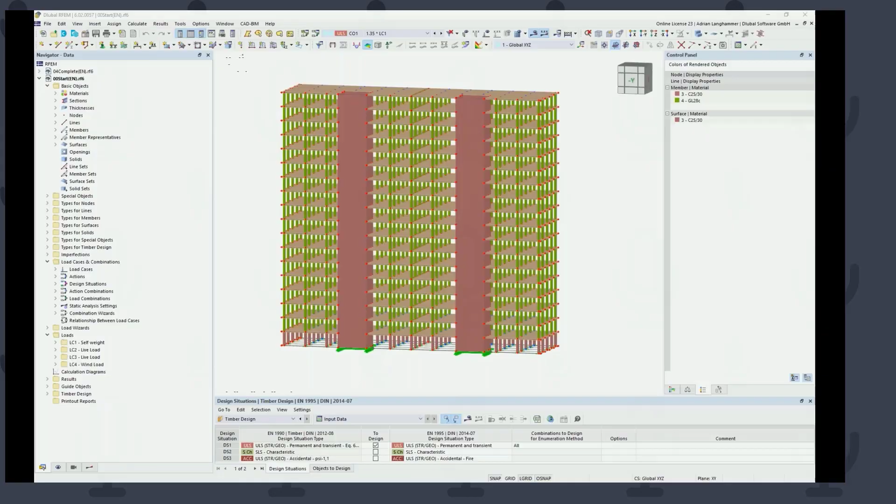Okay, that's all from my side. I hand over the screen to Adrian. So you should see now my screen. Yes. And our example, yeah. Okay, then I will start.

Yeah, today is our third webinar regarding the construction stages. Today, I would like to show the construction stages analysis based on an example which I got from my colleagues from the Timber team. They use it in their Eurocode 5 training. This example is based on a customer example from our customer Fast + Epp. You could also find it on our website. Partially, it was designed in RFEM 5.

It is an 18-story mass timber hybrid building, which was built in Vancouver. The first story of the structure is made of concrete. Also, the core is made of reinforced concrete. The columns are made of timber. They have a square cross section with 35 centimeters a side. The slabs here are made of 5-ply cross-laminated timber floor panels, CLT panels, which have a depth of 24 centimeters.

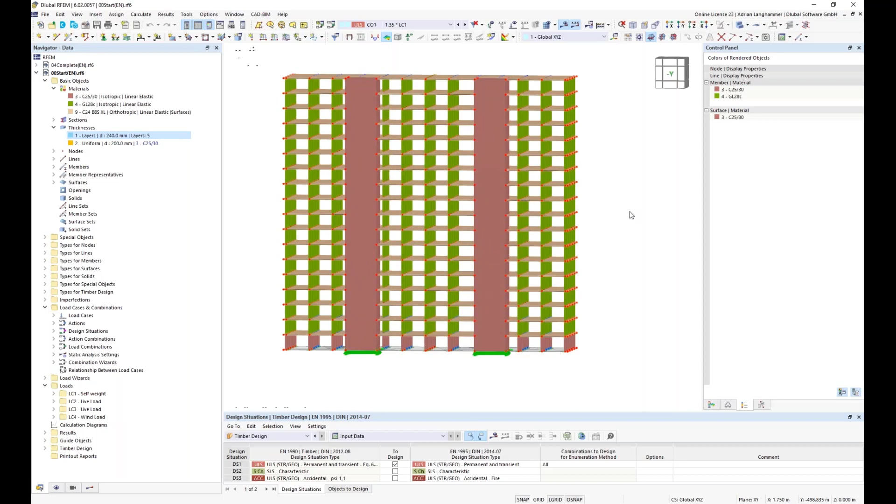But the focus today is not the timber design. It is rather the determination of the internal forces for the design and the consideration of the construction stages. In the beginning, I have the whole structure, which was calculated without considering the construction stages. And first I will have a look at the results without consideration of construction stages. So to do this, I switch over to the wireframe model.

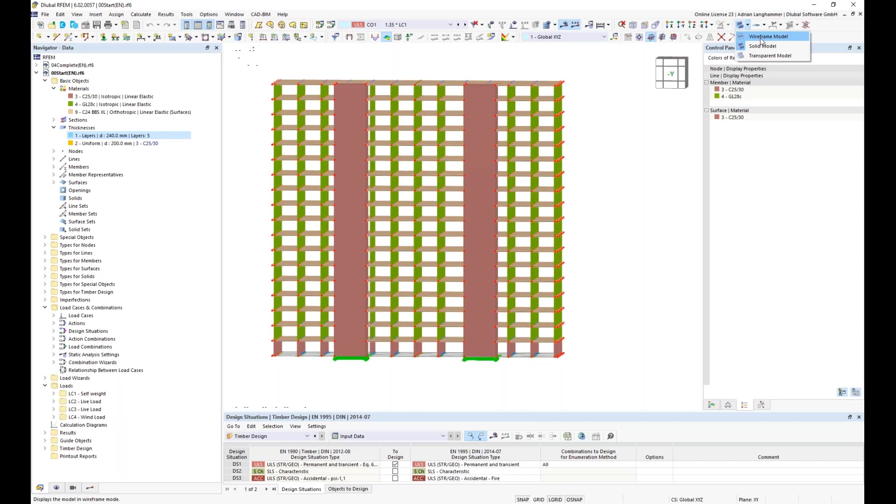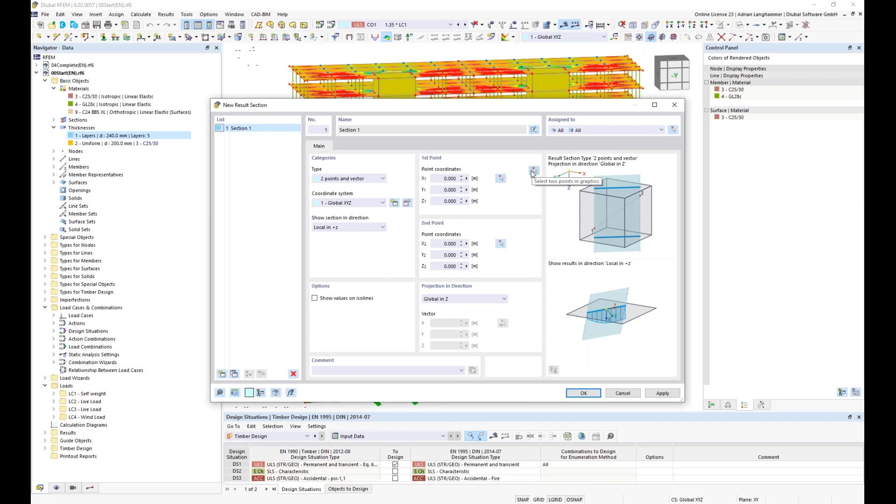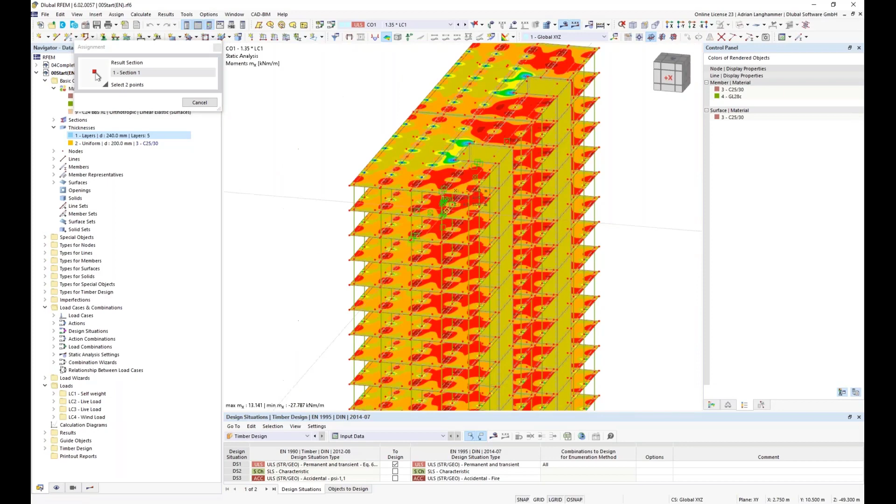We have here the internal forces in the slabs, but to have a better overview, I will create a result section through the building. You can find it here. I will do it graphically with 2 points. I could choose different planes, but I choose a plane which crosses the building core. So, for example, from this upper edge to this lower edge, the second plane here of the columns, and I say OK.

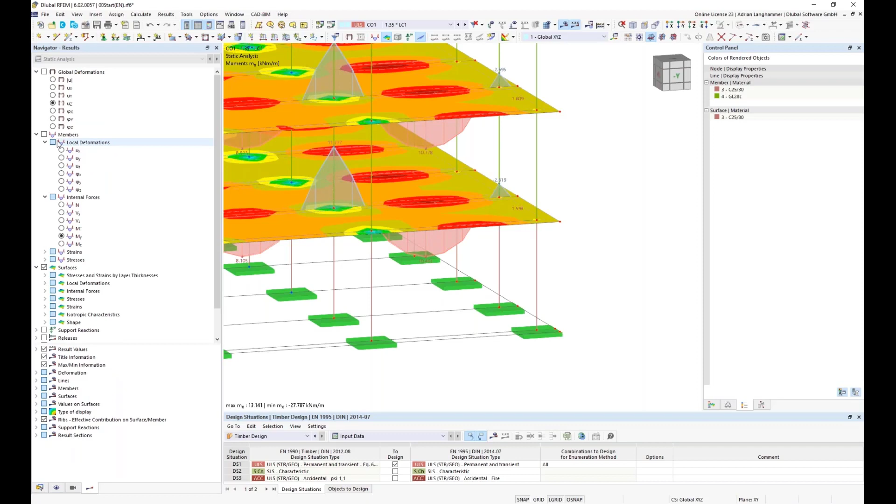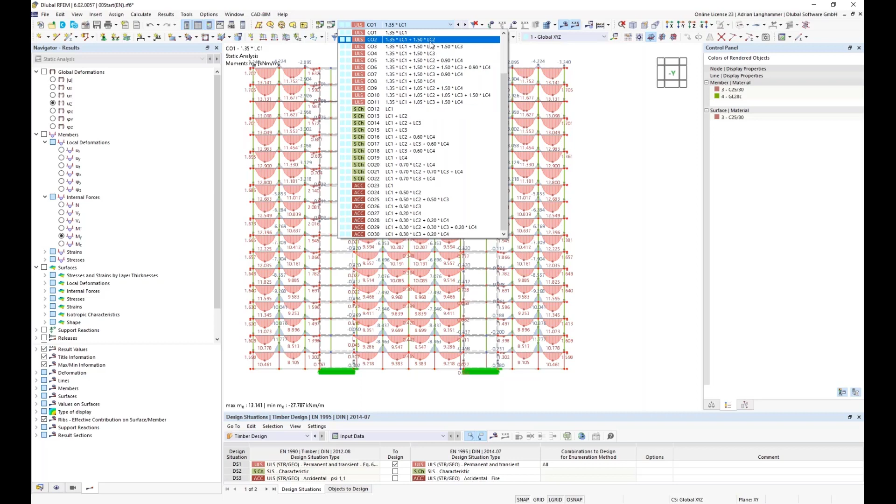It will probably need a bit to load the results, and then I switch off the surface results to have a better overview, and I look here in Y direction at the results. I look at the results for combination 1. Load combination 1 includes only the factorized permanent loads, but no live loads or wind loads. The effect of considering or not considering construction stages is especially related to the permanent loads, and that's the reason why I choose here the combination 1 to look at the results.

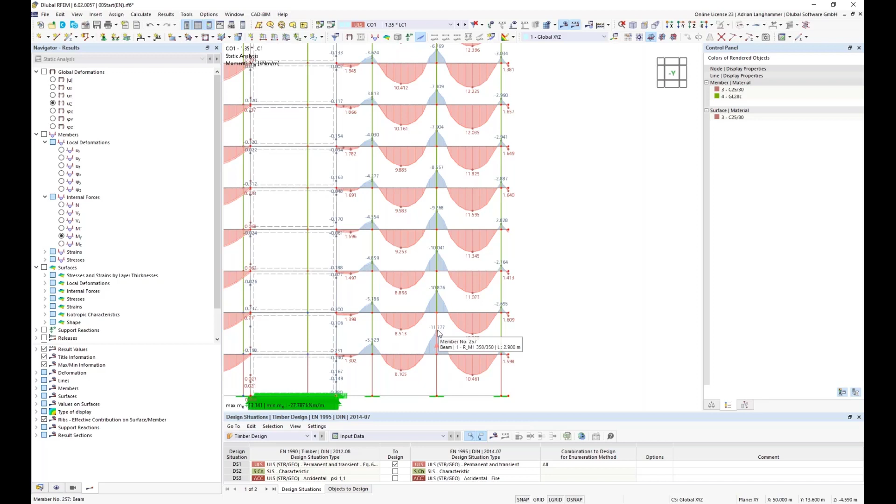So here it is recognizable that the moment, for example, here in this area, the moment over the support is decreasing over the height of the building. So the higher the story gets, the lower the moment above the support is.

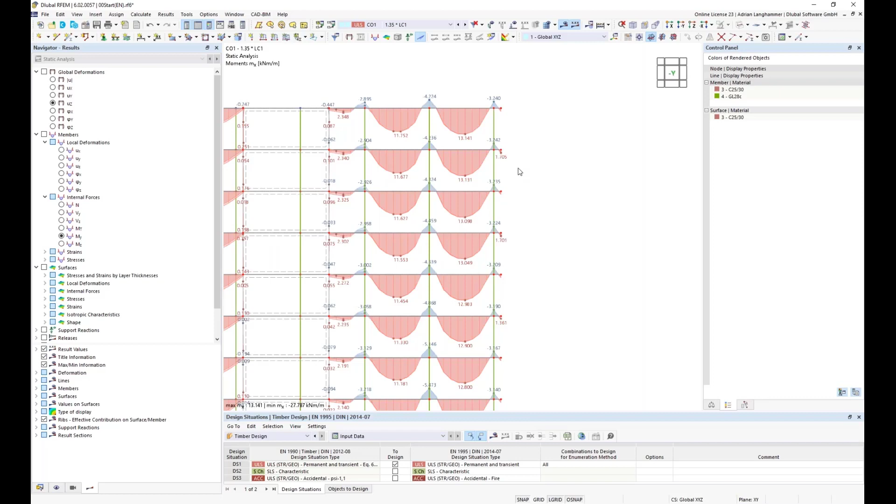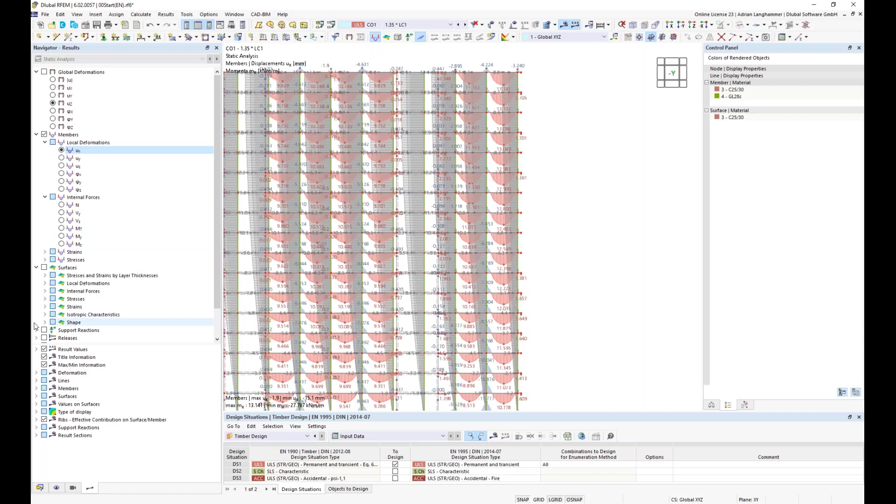This effect appears because the deformations of the columns are added up in this structure, in this situation. We can have a look at the actual deformation of the columns. The values themselves don't matter, but you see that the deformation increases with the height of the building, with increasing stories.

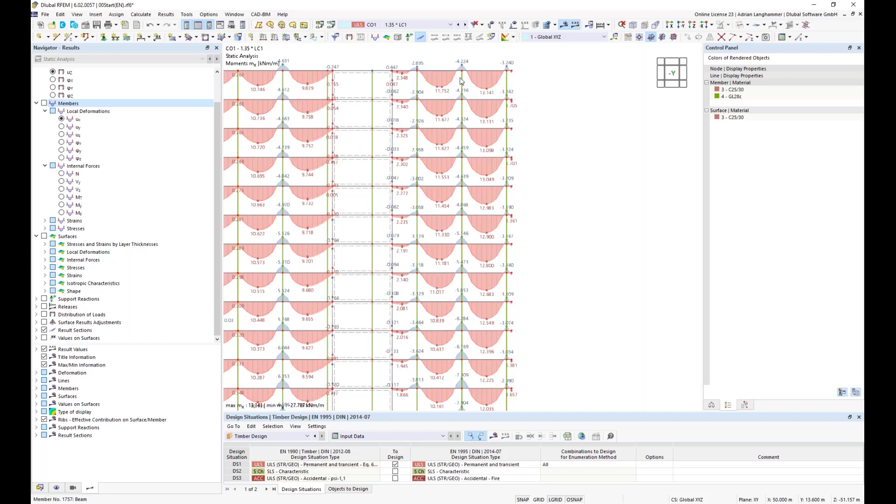And that's the reason why I get here a smaller moment about the support. It is also caused by the slender columns themselves, because they have quite a low stiffness.

But in reality, the permanent load is not applied at once to the complete building. The structure is built step by step, and the permanent loads are also applied step by step, for example, typically story by story. It depends on how you build the structure.

But during the building process, some of the deformations are compensated. At the moment, with this structure, we do not consider this fact, because we do not consider the building process. And this leads to this effect here.

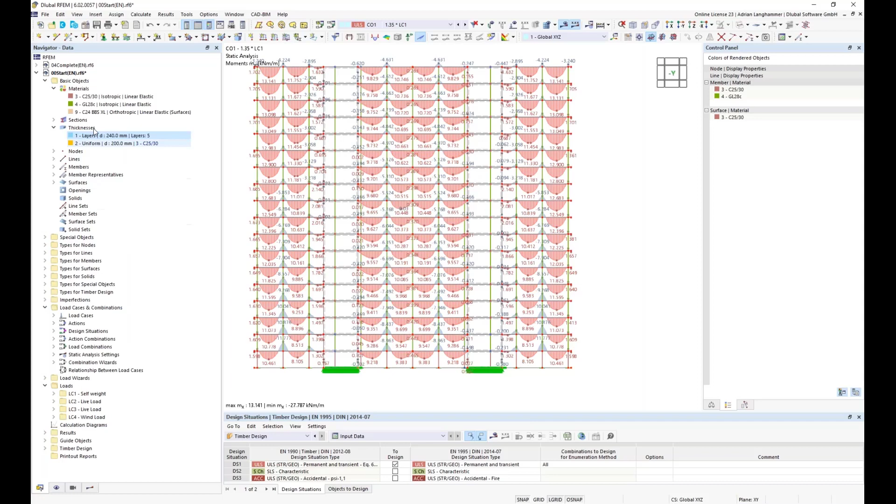To consider the building process, you could use the add-on Construction Stages, which you could activate here in the base data, where you could also activate all other add-ons. You find it here, Construction Stages Analysis, or CSA. I will activate the add-on, and with activating the add-on, I get the possibility for an input.

So I can, for example, create a new construction stage. There are two components for the input of construction stages: the structure side, where you define which parts of the structure are active, and the load side, where you decide which loads are applied in the single stages. We will start with the structure side.

With this dialog, after I've created stages, I will also get construction stage objects in the load cases and combinations. But first I have to create construction stages. The common way to define these construction stages is in the dialog. I will show it briefly.

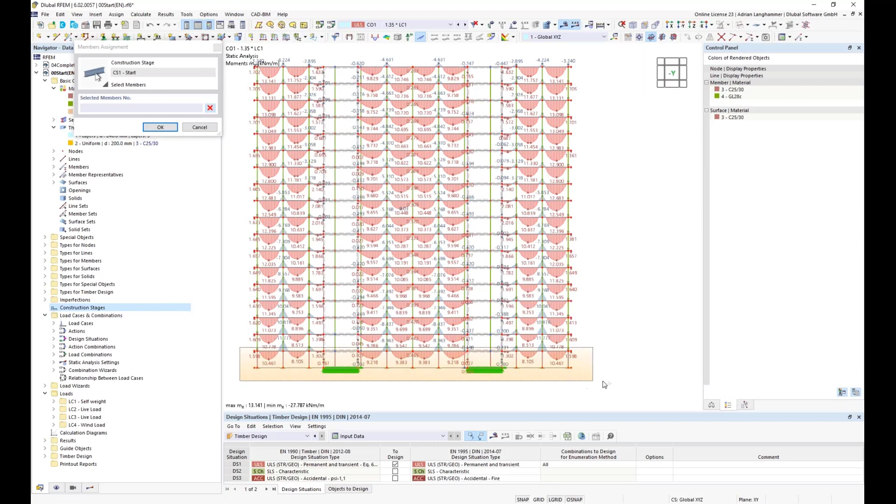You can create the construction stages depending on how many you would like to consider, and then activate the elements you would like to consider, for example, members and surfaces. Depending on the options, you get additional tabs for the members and surfaces, where you can choose the objects graphically, for example, the columns of the first story, and the same for the surfaces.

You could also do the input numerically by hand. So this is, let's say, the common way. This way was shown in detail in two older webinars, which you find on our website. But today I want to show a different, alternative way of input.

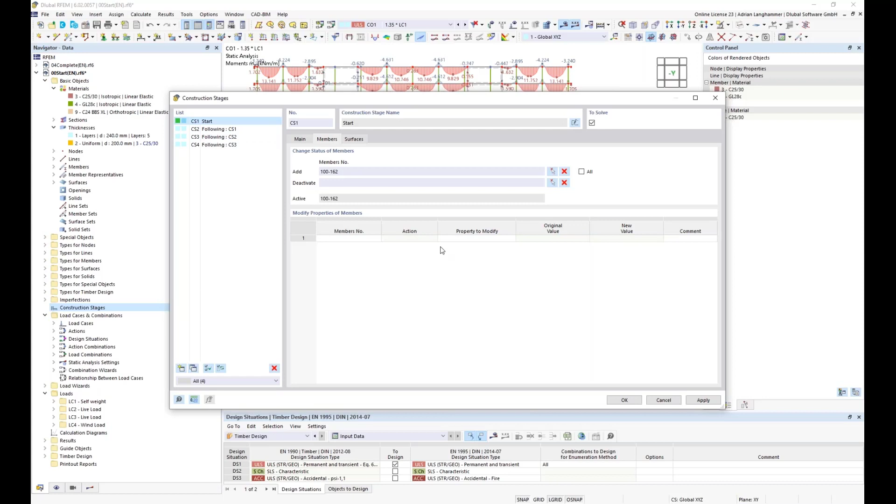The construction stages can also be connected to our programmable interfaces, our web service and API, and this is what I would like to show today. So I completely delete the stages again, so that the input is empty, and I leave the dialog.

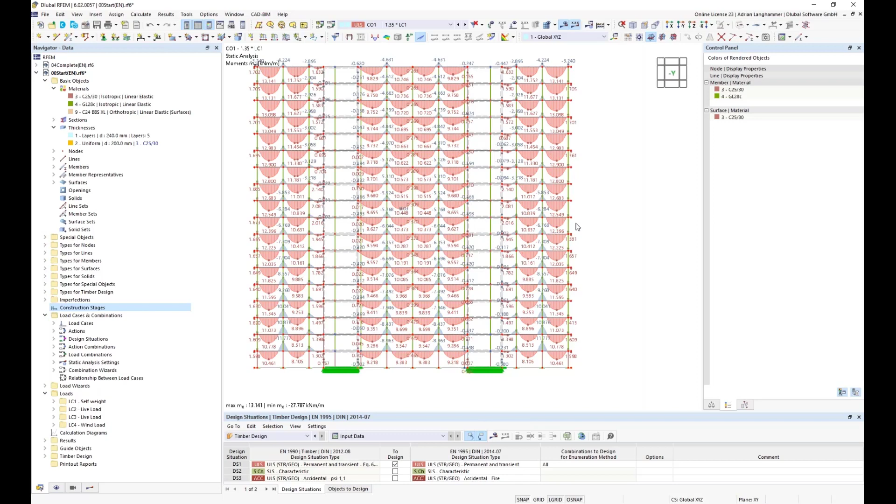Using our programmable interface for the input could be an option if you have, for example, a structure with a high number of stages which are all similar, like here. But you could also use it if you have similar projects where you always want to use the stages. I will switch off the results.

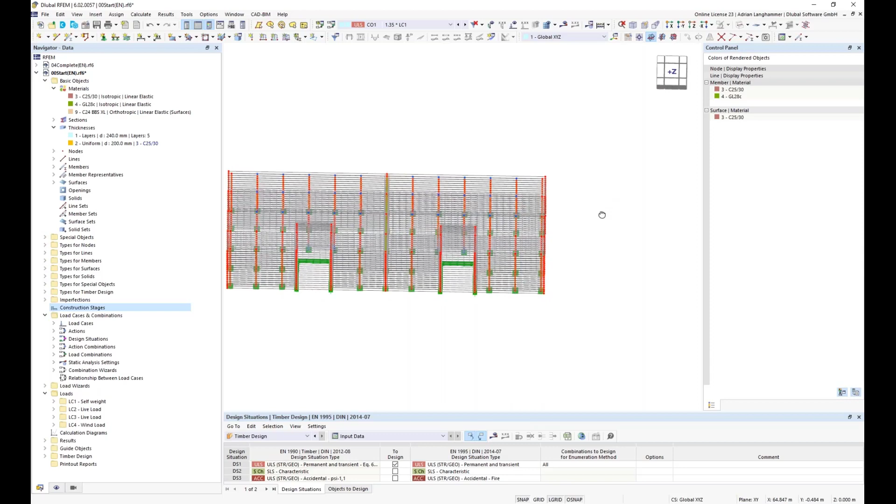My colleague Thomas created a small program which we can use for the automatic input of the stages, and the program works as follows. First, I have to select a row of nodes such that for each story there is a node. Maybe I can show it here: a node at the beginning of the story and at the end of the story.

If I then start the program, which uses our API, the program generates groups of elements based on the selected nodes, depending on their coordinates. One group is generated for each story, and depending on the coordinates of the nodes, lines, members and surfaces, they are assigned to a group.

So for each stage there's one group, or let's say for each story there's one group. And afterwards the program then generates the stages automatically, for each story one stage, and it assigns the elements automatically to the stages. So we wrote the program in a way that it uses members and surfaces, but that's just for an example. So I will start now the executable

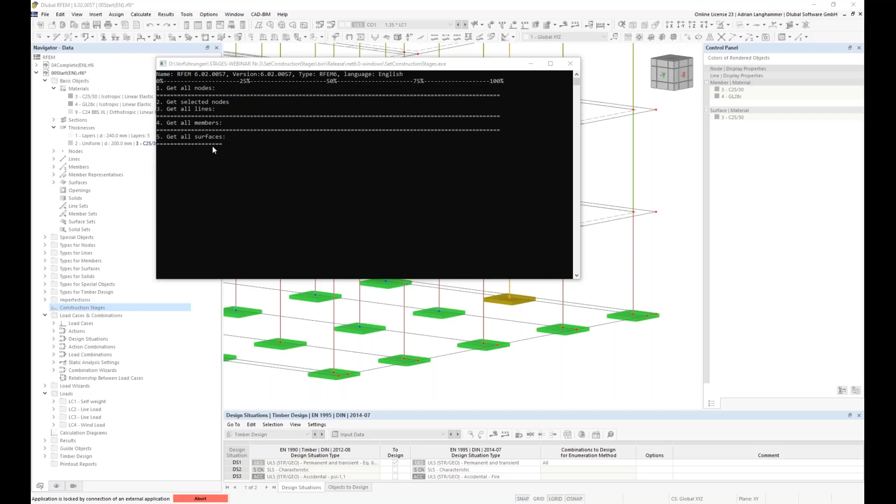here, and we will see what the program is doing. In the beginning, it gets all nodes, and then all other objects. So it first gets all nodes, then the selected nodes, and then all other objects, and it will group them to, let's say, the single stories, and then it will write the input for the construction stage. The writing or setting the input should be quite fast. Reading needs a bit of time. Yeah, so now it's done.

And we see here the input. I will not explain the programming in detail, or the source code in detail here, but we will attach the source code afterwards to the recorded webinar,

and if you like, you can have a closer look, and also if you like to know more about our web service and API interface, or if you want to have more examples or introduction videos, you find detailed information here on our website in web service and API. There should be some introduction videos and so on.

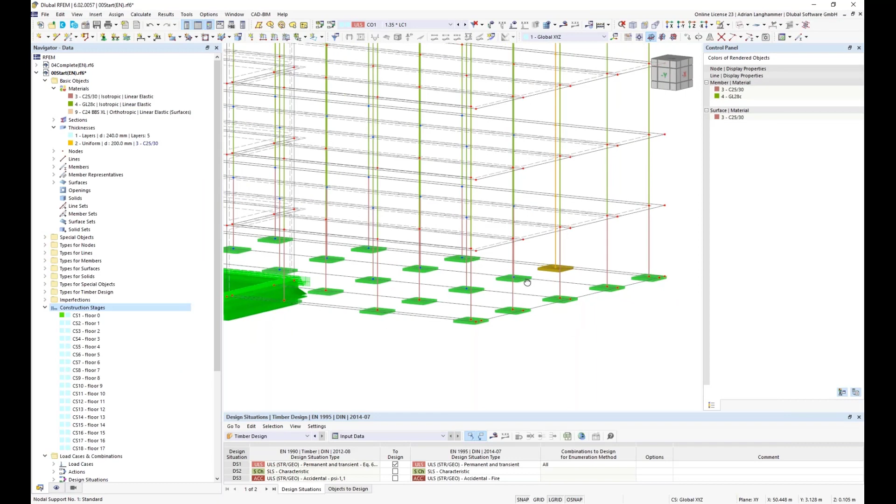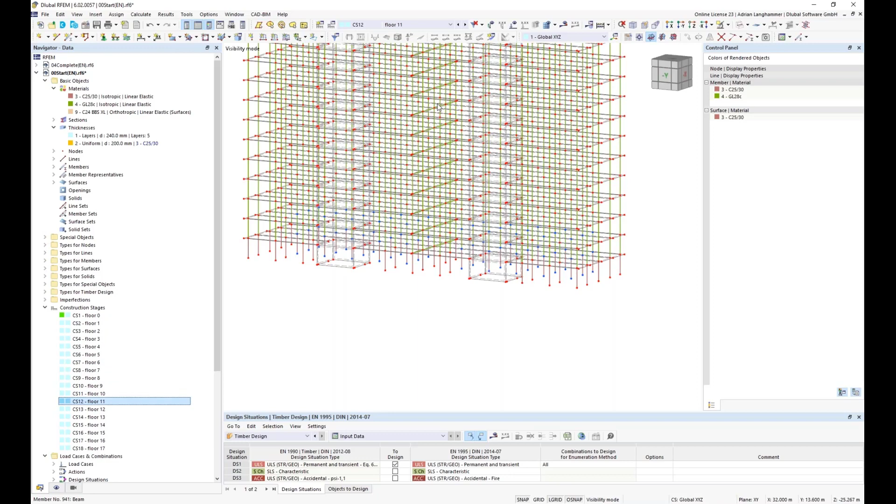So here, for our example, the program we made did the input for the stages. So I can here go through and check the generated stages and the assigned objects graphically. There are a lot of columns, members, and surfaces here. It looks reasonable, but now I only have to assign for the first stage the supports. Of course, this could be also done with a program, or could be also part of a program.

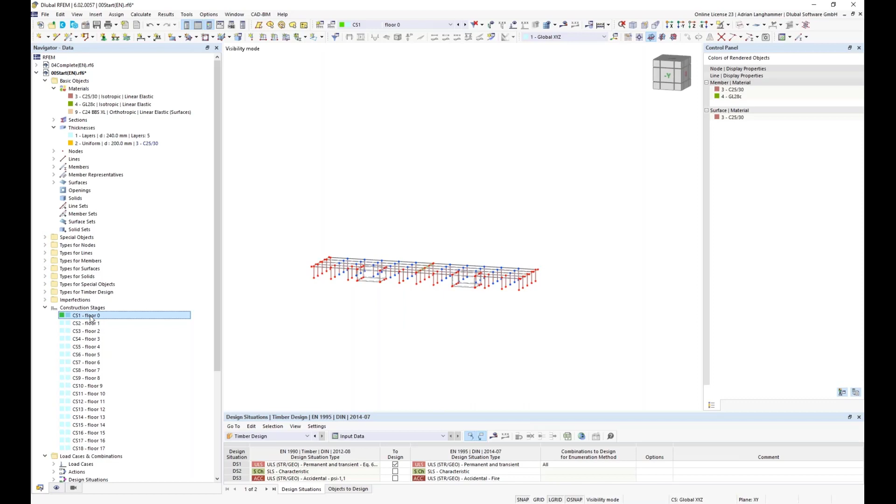But in this example, we did it just for the members and surfaces, and it should not be a high effort to select the supports, nodal supports and line supports afterwards, because I only have supports in the first construction stage, and I could here assign them in the dialog by clicking here all nodal supports, and all line supports should be used in the first stage. So this is not a big effort. That's the reason why we didn't put it in the program.

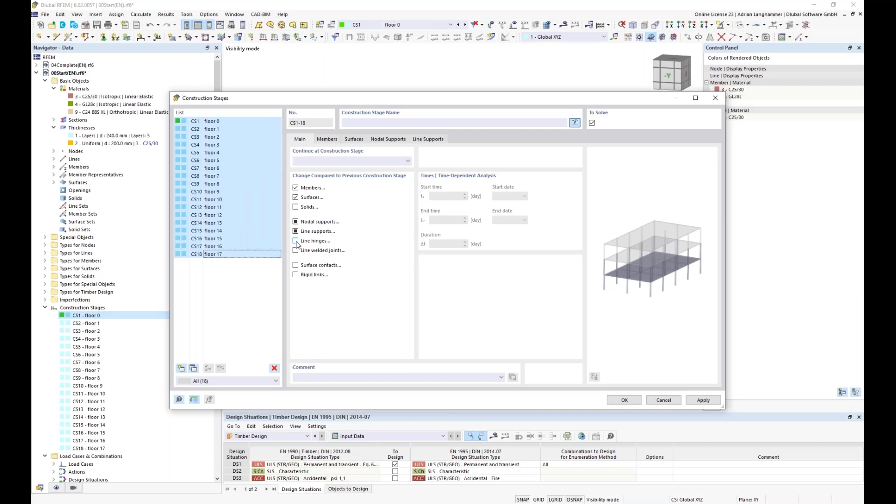Also, I have to assign line hinges for the construction stages. The line hinges were maybe not shown in the whole structure, but we have several line hinges in the structure, and they are assigned between the CLT slabs, and I now will use them also for the construction stages. So I will select all construction stages and activate the register line hinges. And if I go here to the register and use this all button, the program automatically chooses all line hinges which are part of surfaces which are active in this particular stage.

So if I click here, for example, on the first construction stage, I see here which line hinges are active, and it's written in a way that first there's the number of the surface, and then all lines which have line hinges. So for example, here for surface number 100, there are the following lines with line hinges, and it's the same way then for surface number 102 and so on. So the program uses the line hinges for all surfaces which are active in a stage, and automatically activates them. So this is done here. Okay.

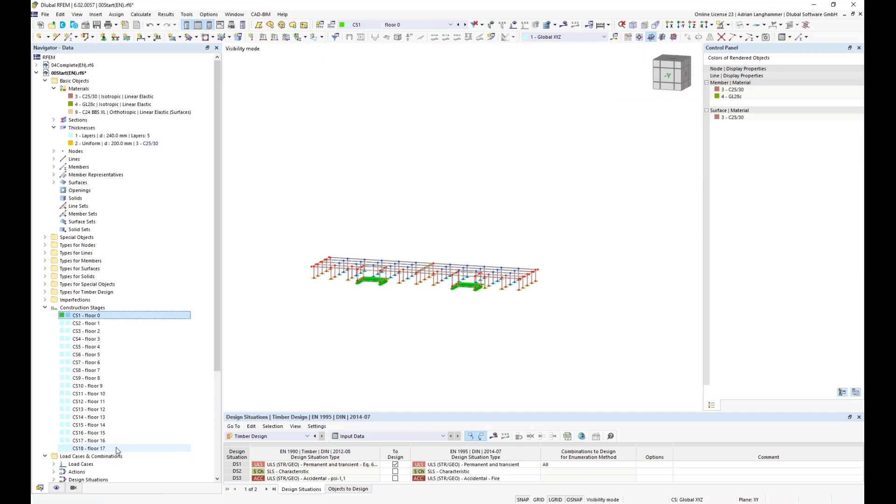So this should be the input for the structure. So the input should now be complete. I can of course check it here graphically again, but now I could continue with the input on the load side.

Once stages were generated here, you have an input in the load cases and combinations for the construction stages, where you could open the dialog for the loads, or you could also use this button here at the top, and it opens the stage which is selected here. So for example, this.

So here you have the input for the construction stages, for the load cases and settings regarding the calculation and the combinatorics. I will start here not in the main register. I will start with the load cases, with assigning the load cases.

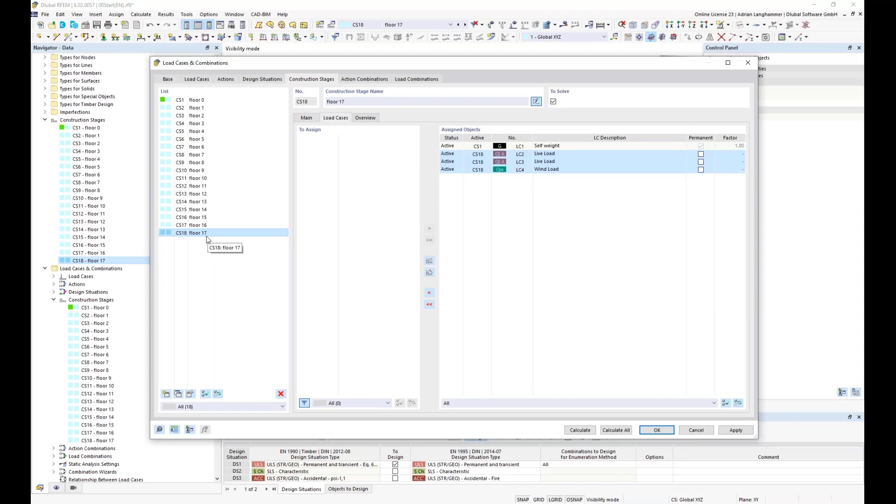So when I've done the input, I can switch back to the main register. Here you find different settings, for example, settings regarding the construction stages analysis, whether it should be done with load combinations or with load cases and result combinations and linear superposition. At the moment, in the current state of development, we only offer the option with the load combination. The other option will follow later.

The possibility to consider these stages by using load combinations is the more complex method compared to the linear method. So here you could also handle non-linear structures. Compared to the linear superposition, it's a bit more complex, but you could use it for all kinds of structures.

Here you could choose the static analysis settings. Stages at the moment always have to be calculated with the Newton-Raphson solver, but you could choose geometrically linear or P-Delta or different possibilities. Here I calculate geometrically linear.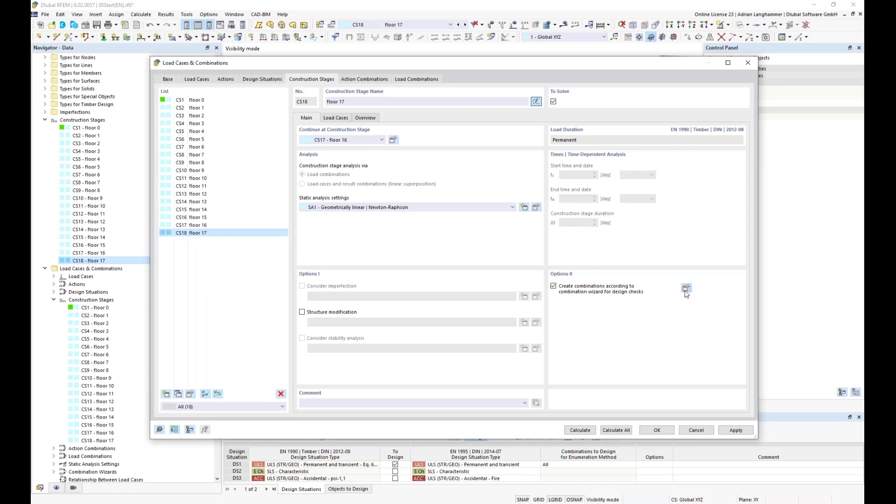You also have some detailed settings here. I would use the combinatorics only for the construction stages. And there's one important thing about the settings. You have to make sure that the static analysis settings here and for the stages are the same. Otherwise, it will not work. I guess you should get a hint, but it will not work if you use different methods for calculating the load combinations than for the calculation of the construction stages.

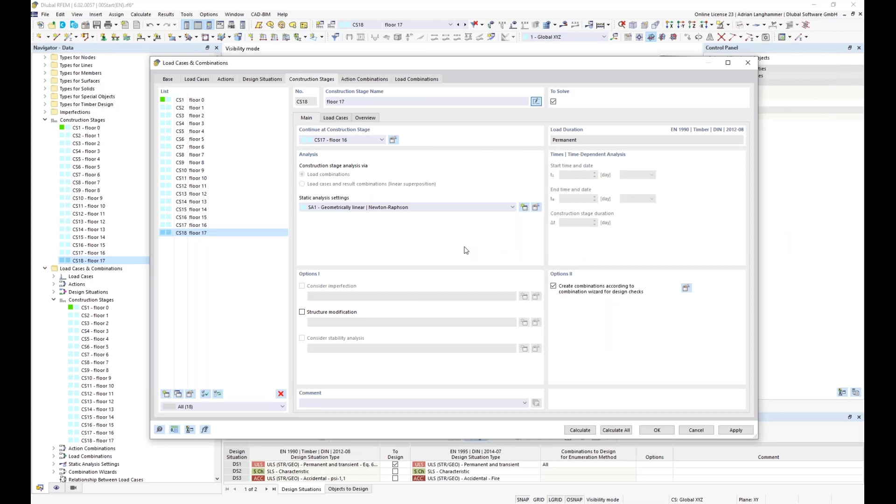Okay, so I will agree here. And if my input is correct, then I should see the action combinations which are generated. And I see that they are all generated for construction stage number 18, which is my final state. If you, for example, do the combinatorics also for other construction stages, you get the same action combination several times, but for different construction stages.

And it's quite similar for the load combinations. The load combinations should also be generated automatically. Here are the common or typical load combinations for the design, which are all done for construction stage 18. You see it here also in the description.

But here you see, next to the common normal combinations which you use for the design, you also have other additional combinations. These are auxiliary combinations which are generated to consider the factorized permanent load. These auxiliary combinations are generated in the case that you have a factorized permanent load for these stages.

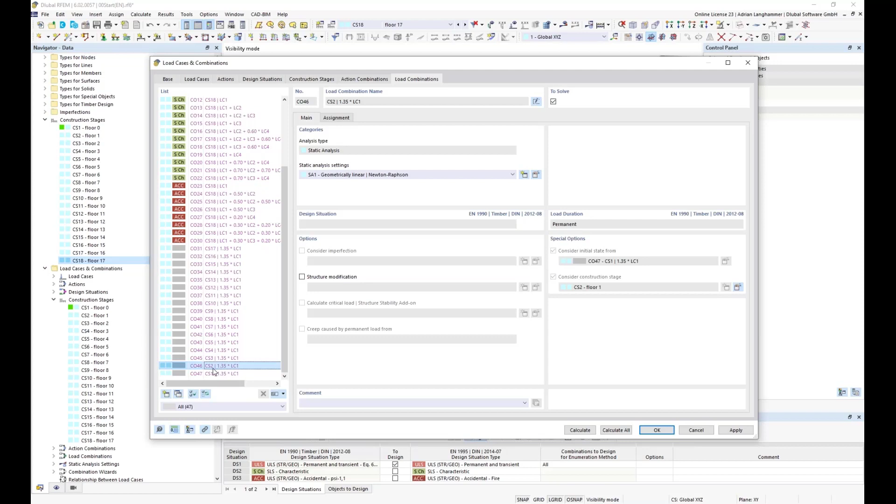And if I go to the auxiliary combination for construction stage 2, I see that here it uses an initial state which is considered for construction stage 2. So the initial state is the result from the calculation with factorized load from construction stage 1. So there's an initial stress situation which is considered, and it considers the structure state which is defined in construction stage 2, and it works in this way.

And if you would like to define the combinations manually, you could do it in such a way. You could generate a new load combination, which is then a user-defined combination, or you switch off the combination wizard, and then you could use only manual combinations or combinatorics. The definition of manual combinations was shown in an earlier webinar, the first construction stage webinar. There I've generated manual load combinations, but this should not be part here.

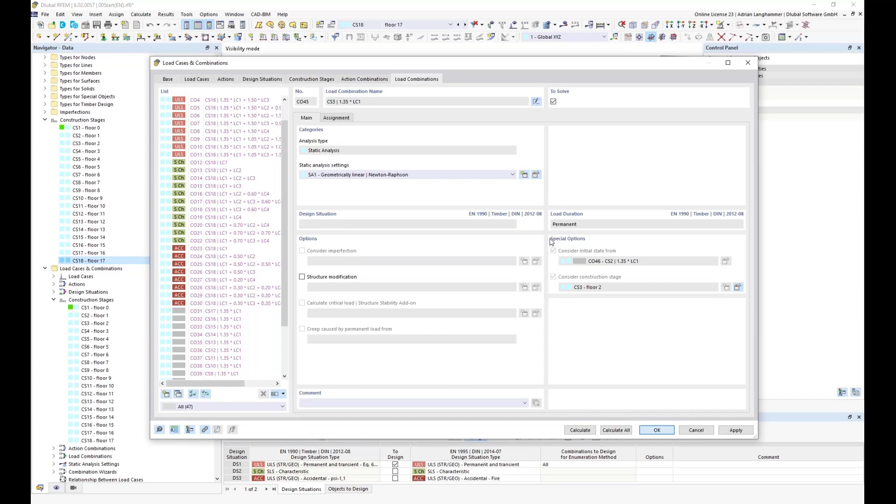So my input here for the load combinations is ready, and for the loads, I agree. Yes, the results have to be deleted, and before a calculation could be started, I will check the input for the timber or for the multi-layer design. I have here activated the timber design. The add-on is active. I have a design situation here, and there's an existing input for the design.

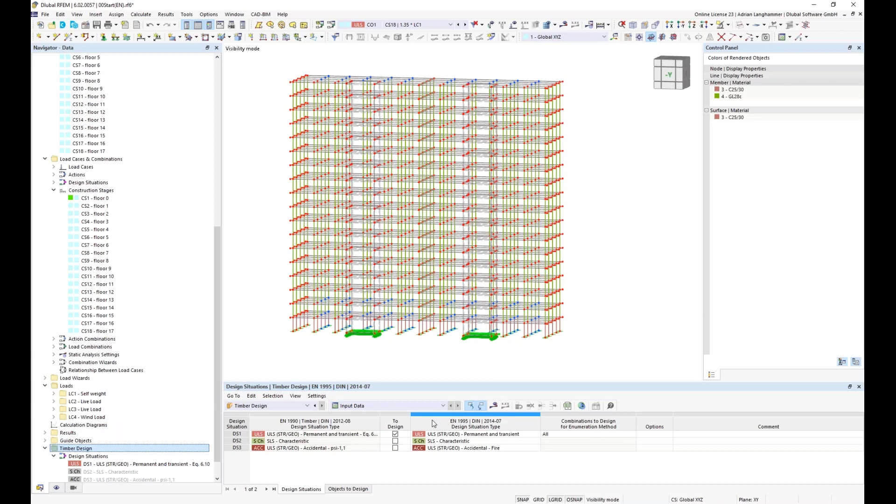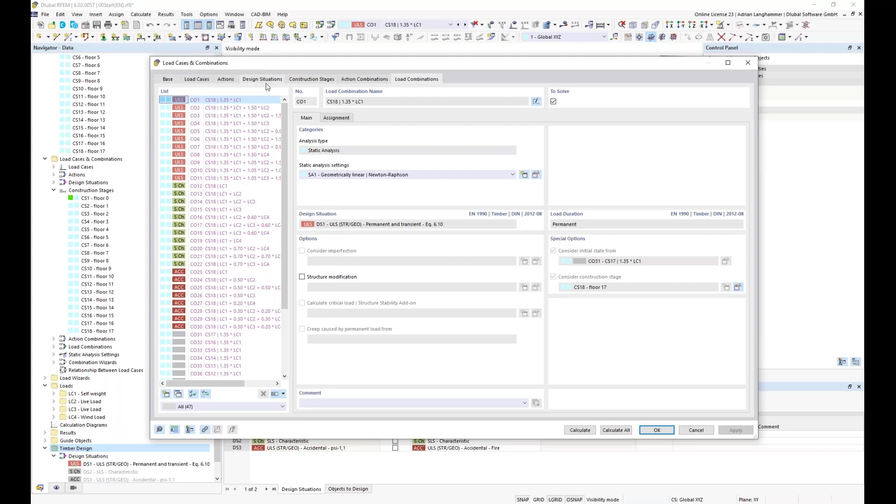So I will have a look at the design situation where I have the information about where this design situation is used. So this is used in the timber design with the input for the construction stages. My load combinations have changed. These load combinations which are generated here are still related to design situation 1. That's the same situation as it was in the beginning. So for considering the construction stages in the design, I have to do nothing more. There's no special thing I have to do.

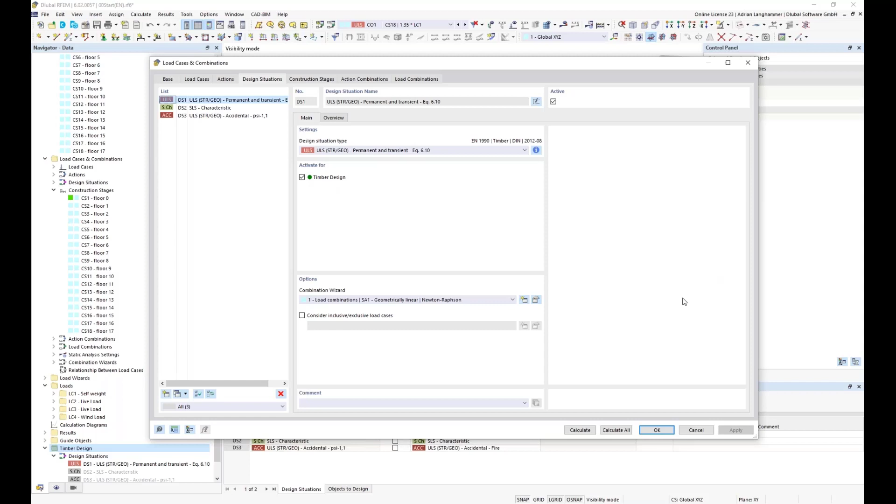As soon as I have the input here for the construction stages and the load combinations are generated for construction stages, these construction stages are also considered for the timber design. So, okay. If I would like to calculate now the structure, due to the size of the structure and because there are a few construction stages, it will need a bit of time to calculate such a structure.

We have to calculate here the original construction stages, which are using the 1.0 factorized permanent load, and we also have to calculate the load combinations which consider the factorized permanent loads, and of course also the common combinations or the normal combinations have to be calculated.

For stages calculation, we could not use multi-threading technology. So this means the calculation for these stages has to be done step by step, one after another, because one stage needs the result from the previous stage. So the calculation is not able to calculate the construction stages in parallel. If you have load combinations here in one stage, the calculation should run with multi-threading, or should run in parallel.

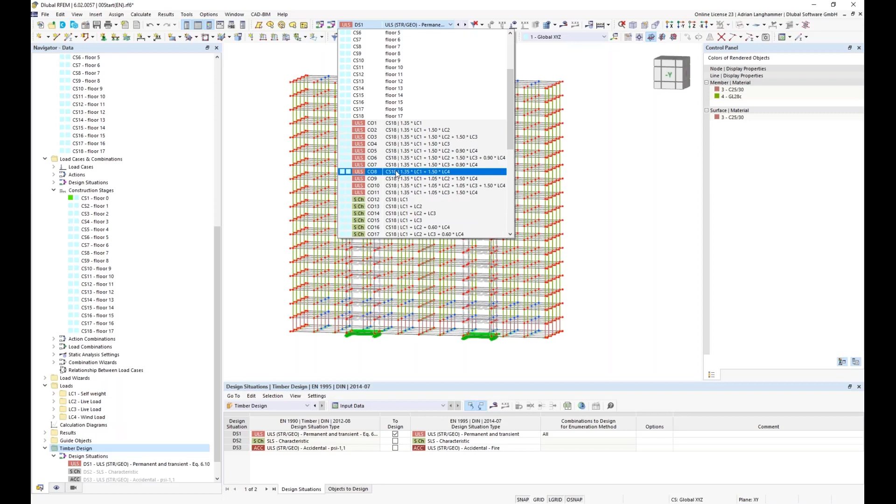The stages calculation here in the structure needs for one stage about 5 to, let's say, 10 seconds. And also the combinations need a bit of time. So the whole calculation will definitely be longer than 1 minute, so I will not show it in the webinar.

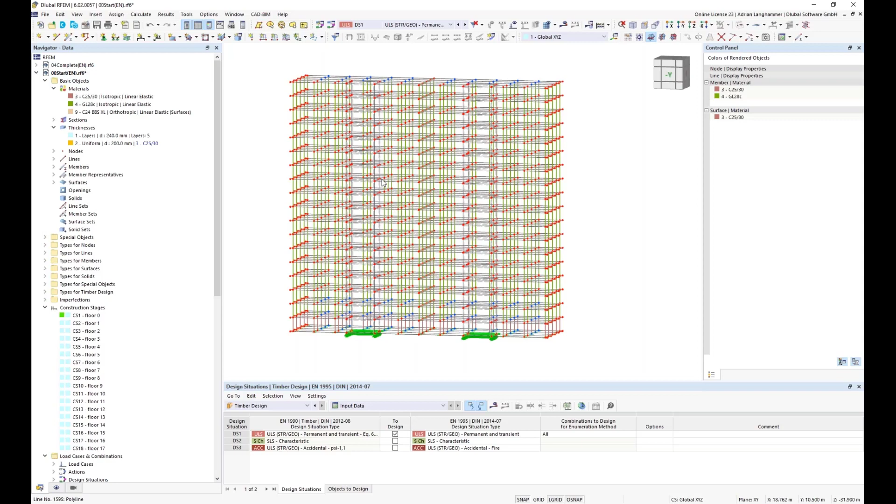On my computer, it took, including the timber design, something about, I would say, 8 minutes. I have a quite common computer, which is not the newest. But it is not the smallest structure. It would need a bit of calculation time. So to avoid this calculation time, I have saved the completed structure with results and have it here.

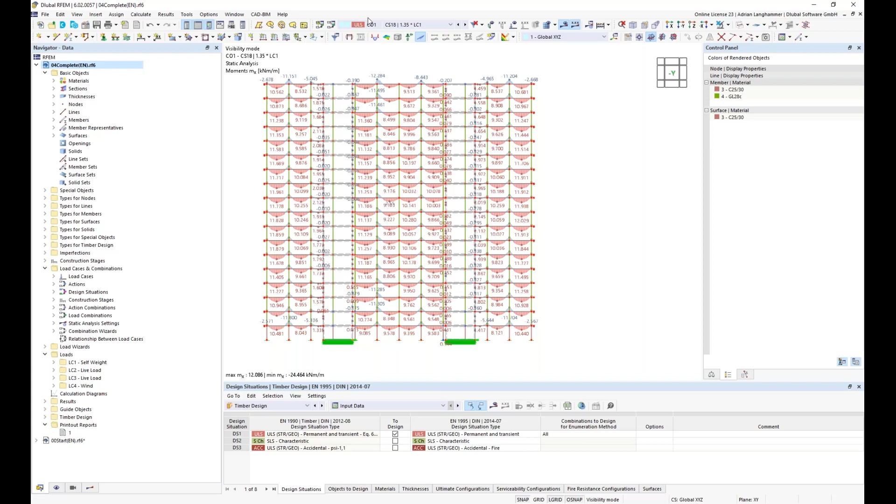I will start with the results for the internal forces, for the bending moments. Same situation as I showed before for the structure without considering construction stages. I also take here a look at combination 1, which includes only the permanent load, and I will have a look again at the results here in this area and at the moments above the columns or above the supports here,

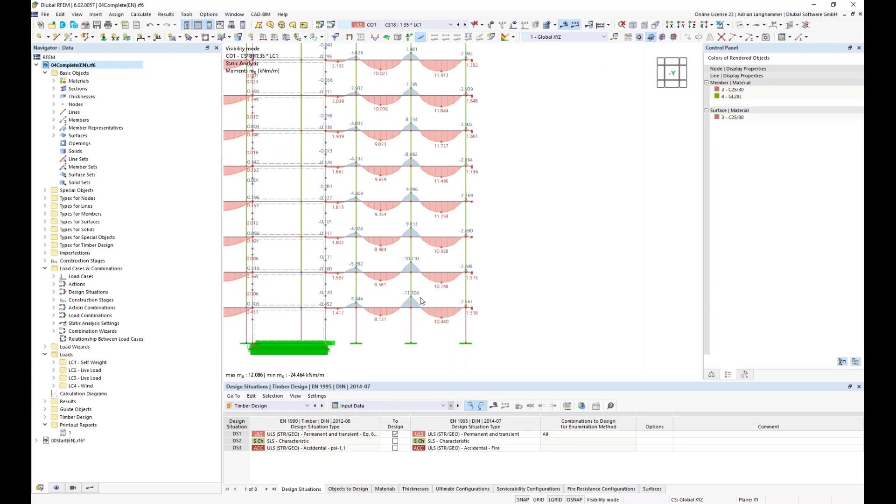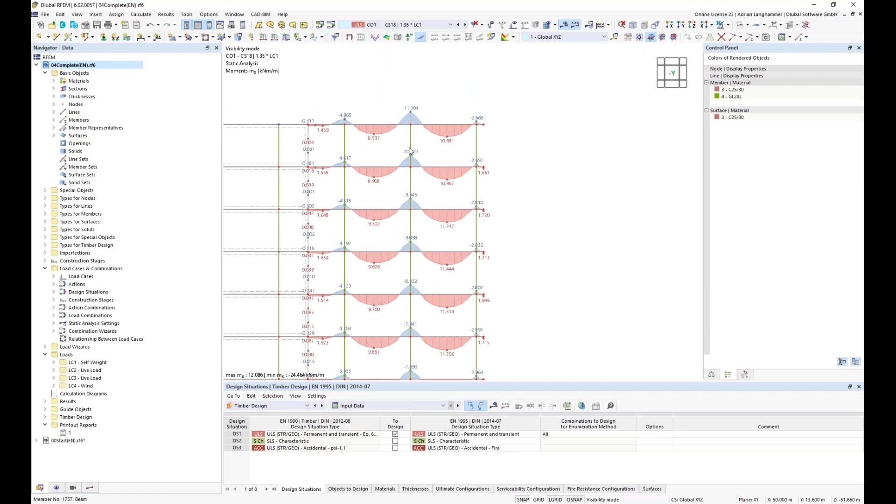and I get a behavior that now the moments are also decreasing, let's say, till the middle of the structure, but then they are increasing again. I could also compare it. I prepared it in the presentation, both situations next to each other.

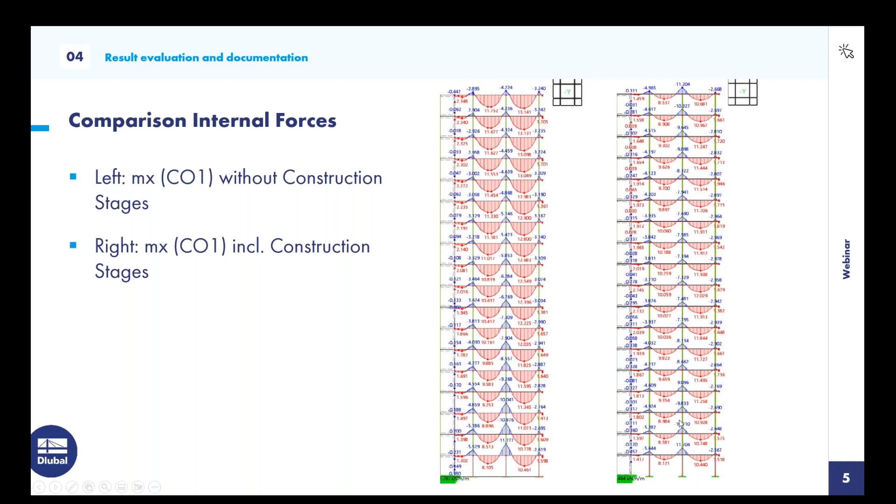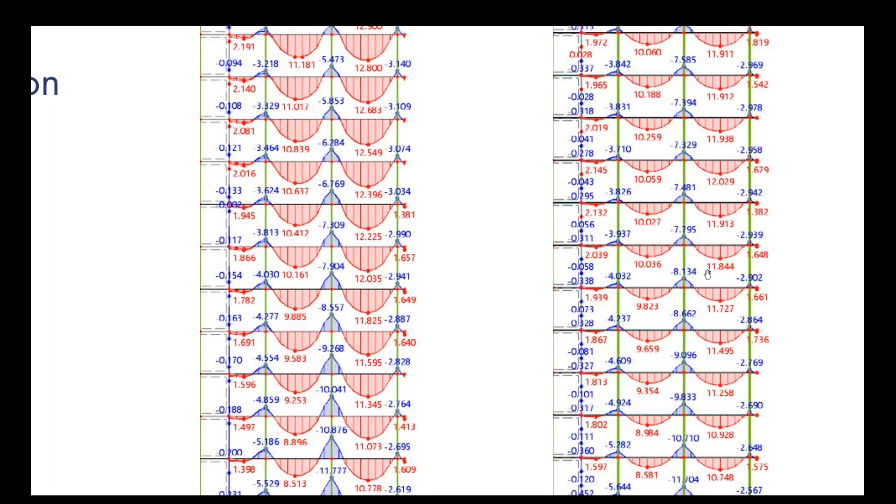On the left side, the internal forces for combination 1 without construction stages, and on the right side, the results including construction stages. You see here in the beginning, there's not that big difference, but then with increasing stories, the moment above the support is decreasing in both cases, but not as much in the case with the construction stages, and in the case with the construction stages only till the middle of the building, and then it's increasing again, while without the construction stages it's only decreasing till the top story.

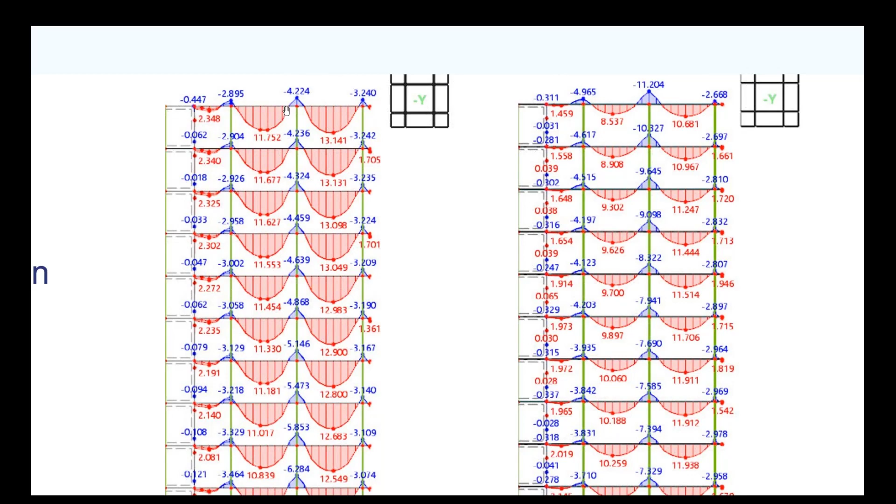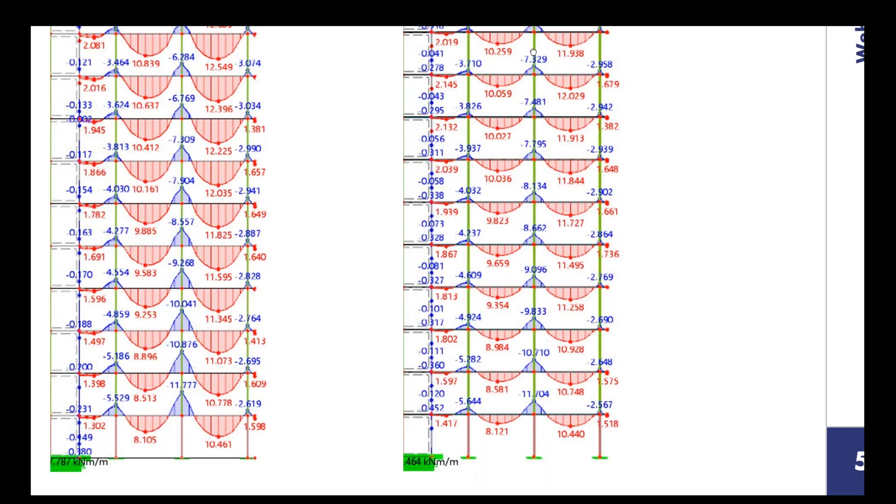And if you compare the results in the top story, they are quite different. The same behavior, or it's vice versa behavior for the moment in the field. When the moment above the support is decreasing, the moment in the field is increasing. So the maximum moment in the field for the situation with the construction stages should be somewhere in the middle of the structure.

So I can try to explain the effect for the construction stages, or explain the behavior. So the question is maybe why is there a maximum for the moment above the support in the first story and in the top story, and in the middle there's the maximum for the moment in the field, but the minimum for the moment above the support.

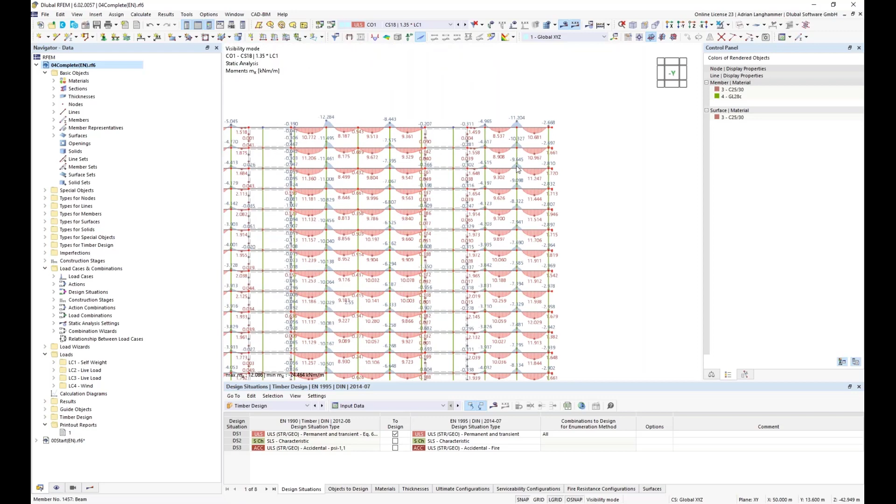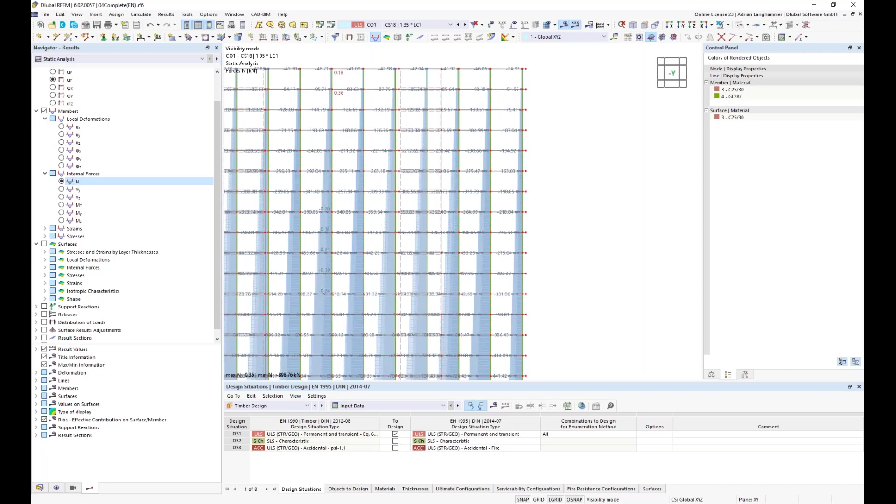In the top story, I don't need the exact values, but if you have a look at the normal forces, in the top story you have the smallest normal force. The normal force is increasing in the columns till the first story. Here in the top story you have the smallest normal force, but if you take a look at, let's say, the support or the columns below this point, you have the lowest stiffness here at this point.

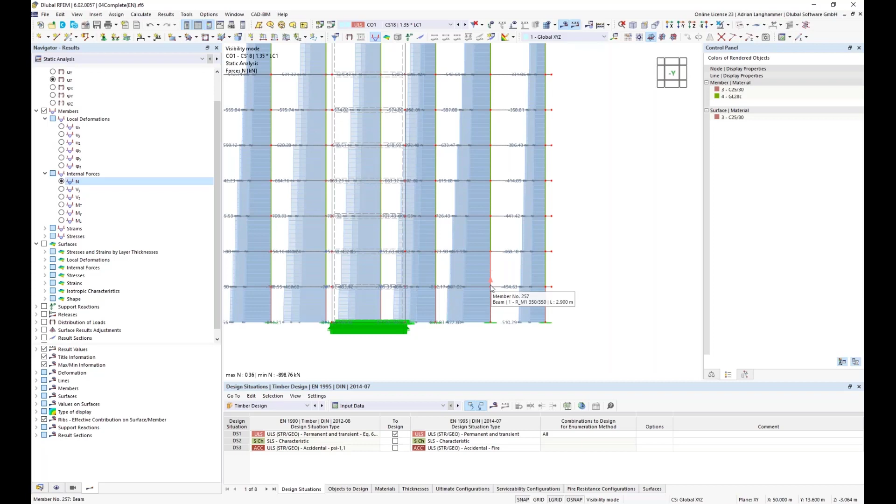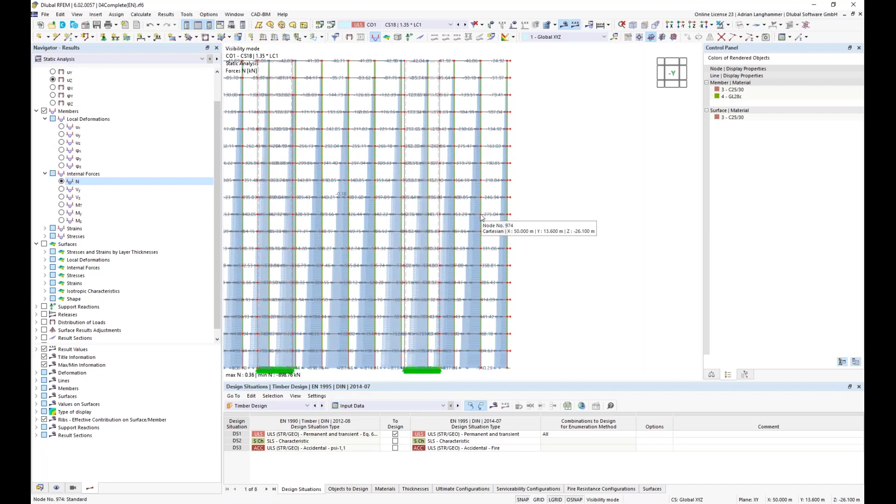In the first story, so at the bottom, you have the maximum normal force in the columns, but you have the highest stiffness, because there are no slender columns, or there's only one column below this point. And in the middle of the structure, you have, let's say, medium-high normal force, but also medium stiffness. And this leads to the effect that here you get the maximum axial deformation of the column. So if I switch to the deformation of the columns, the maximum is here somewhere in the middle.

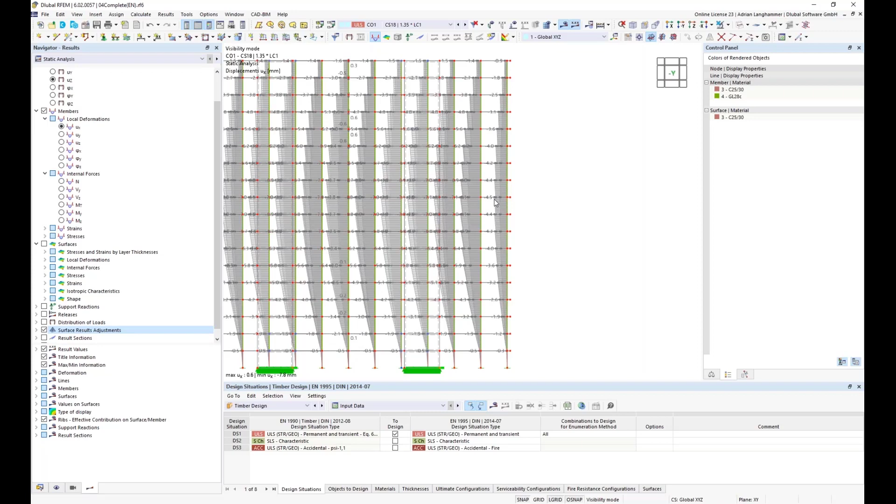And that's the reason why you get here the smallest moment above the support, and the maximum... one moment, I switched it off. That was the wrong one. That's the reason why you get in the middle the minimum value for the moment above the support, and the maximum moment in the field.

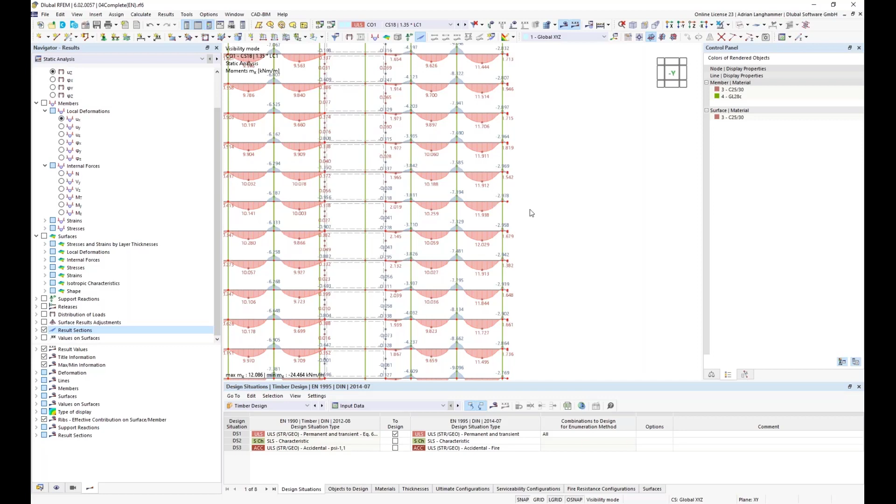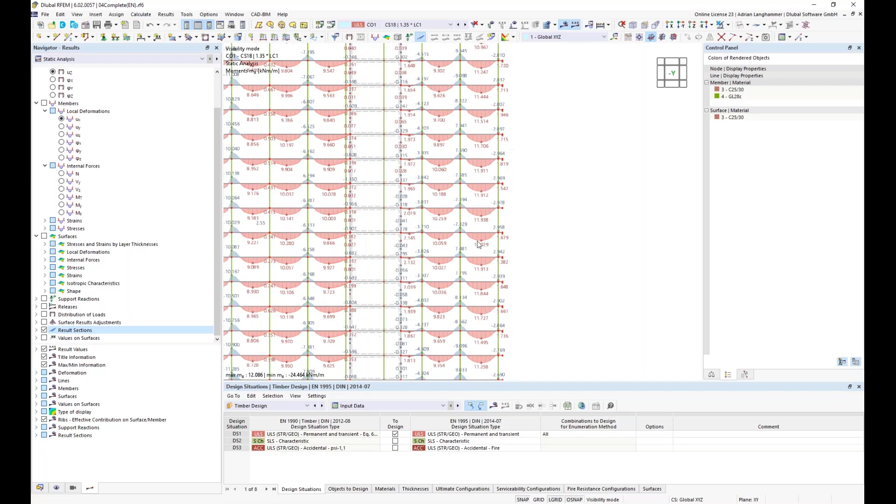This is, let's say, typical behavior for such structures, that you always have to look at the middle of the building when choosing which parts you would like to design, or which is the leading situation. So for the moment in the field, this would be the slab in the middle, which gets the highest bending moment.

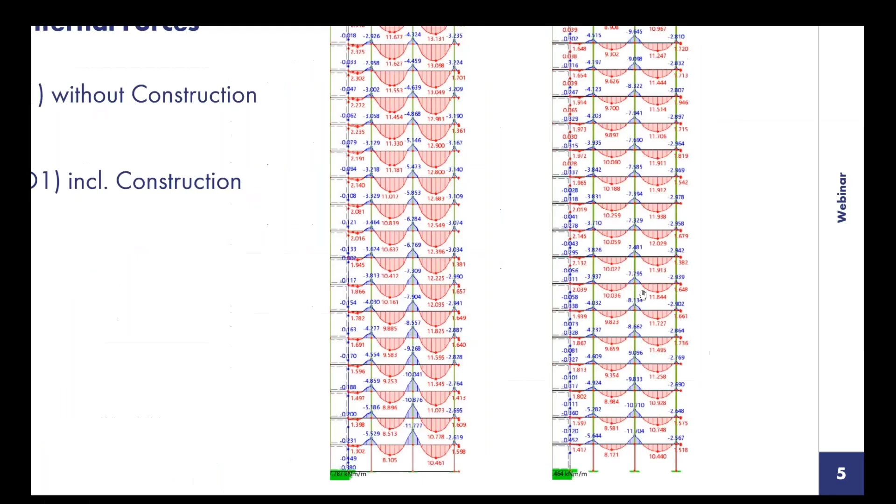Yeah, and the biggest difference between these situations was, of course, the results in the top story. So here I have quite a big difference. So this should be the part about the results compared with and without considering construction stages. At the end, I will show for a short moment also the printout report.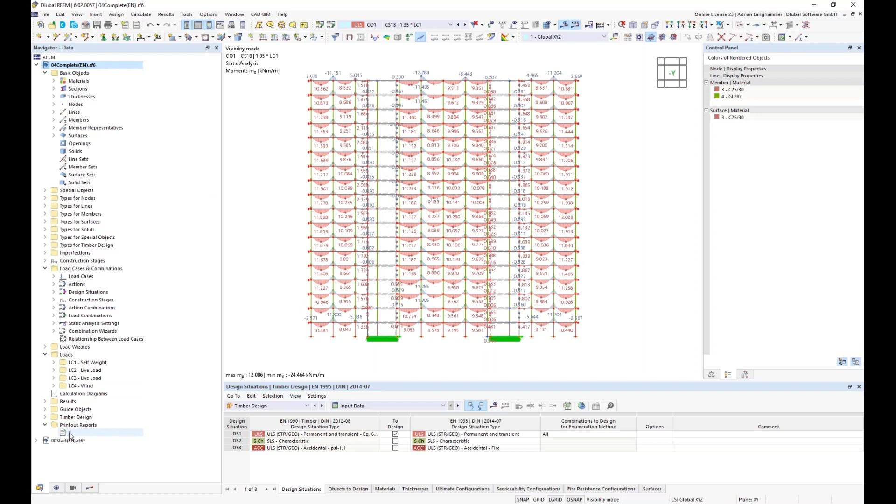So that's all from the result side. If you would like to document the results, the possibilities are, let's say, quite the same for a structure where you consider the construction stages. I have here prepared a printout. So you have the graphics or result graphics as common in a structure without considering construction stages, but you should have one additional point. I will open the printout.

If you use, for example, the multi-print, okay, it has to be generated. So I prepared a printout report where you have pictures or graphics for each construction stage. But I'm not sure if I've opened it before. That could be the reason why the graphics have to be generated first. I don't remember.

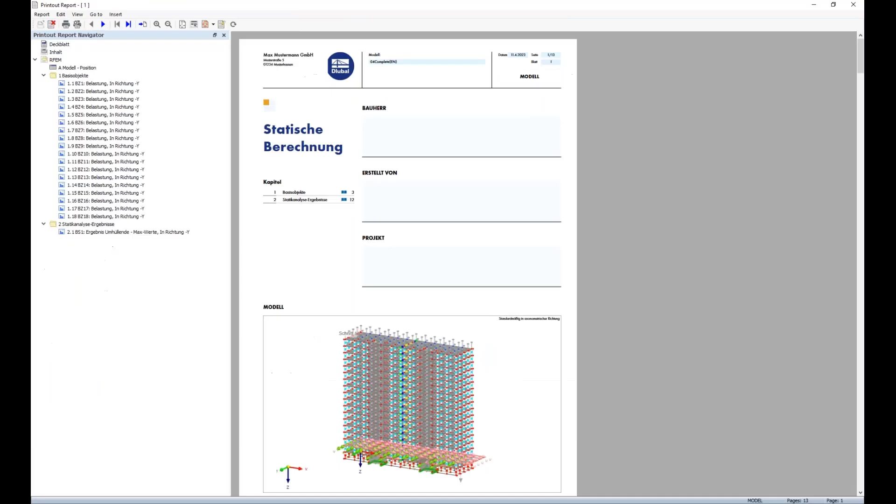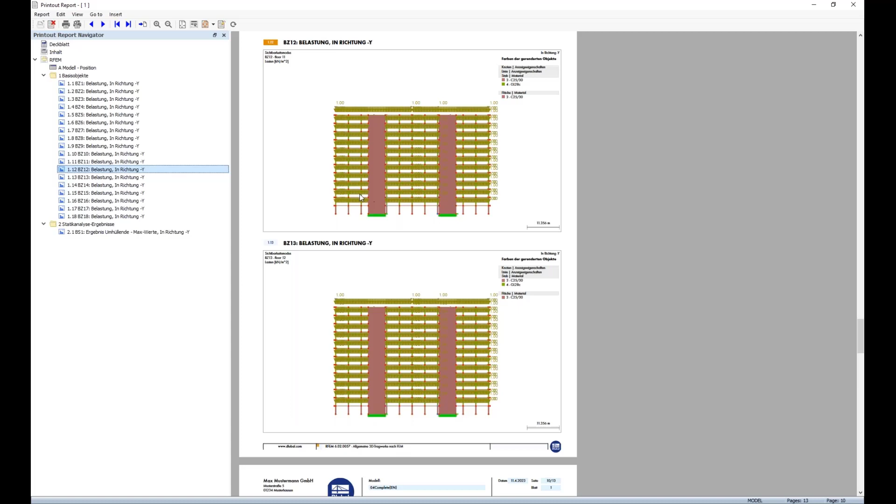So here, for example, you could use the multi-print together with the object construction stage, and you could, for example, print for each construction stage the structure with its permanent loading. In this example, there was the self-weight, which is not shown in this picture. Here only the additional dead load is shown.

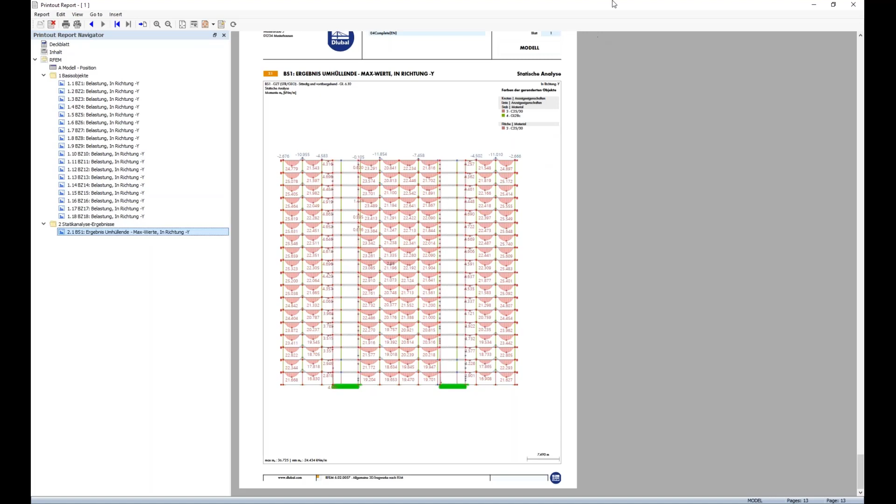Yeah, and you could print it using multi-print, and of course you could also print the results as for, let's say, a common structure. So there are no more special things about it. So this should be all for today from my side.

I will hand over the screen again to Andreas, or Andreas, you would show some additional information. Yes, thank you, Adrian, for this nice presentation. You showed another possibility to create construction stages. As you already mentioned, you showed in previous webinars how to do that in the program only.